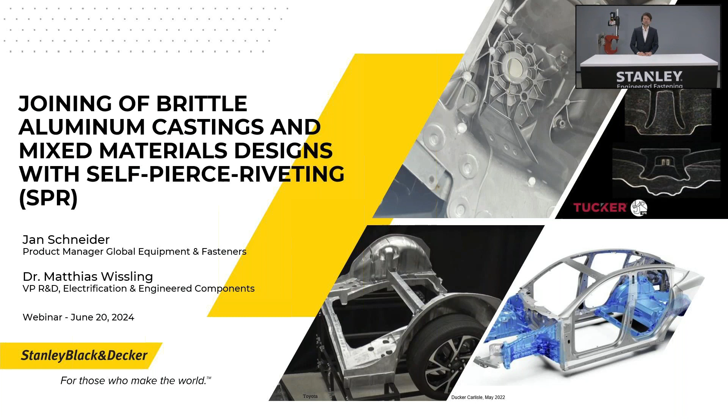It's a pleasure and honor for us today to give you an update on our latest innovations in self-pierce riveting, particularly focusing on castings. I have the pleasure to do that today with my colleague Jan Schneider from Product Management. He will lead you through the vast majority of the slides later on, so I have an easy job this time as I just lead you through the introduction slides.

My name is Matthias Wissling. I made my PhD in 2007 on joining technologies. As Vice President for Research and Development, I do the utmost possible together with the team to make sure that we have technically outperforming solutions for your challenges.

So next slide, please. I think we can skip that slide and go to the Stanley Black & Decker slide. So we are from Stanley Black & Decker.

That is a huge global company with about 17 billion revenue per year and about 56,000 employees. Stanley Black & Decker is organized basically on two main pillars: one is the tool and outdoor business, and the other is the industrial business. Jan and myself, we are from the Stanley Black & Decker industrial business, which is mainly Stanley Engineered Fastening. We have about 80 production and distribution centers all over the globe, and you can find our products in over 90% of all automotive vehicles and lightweight trucks on the road today.

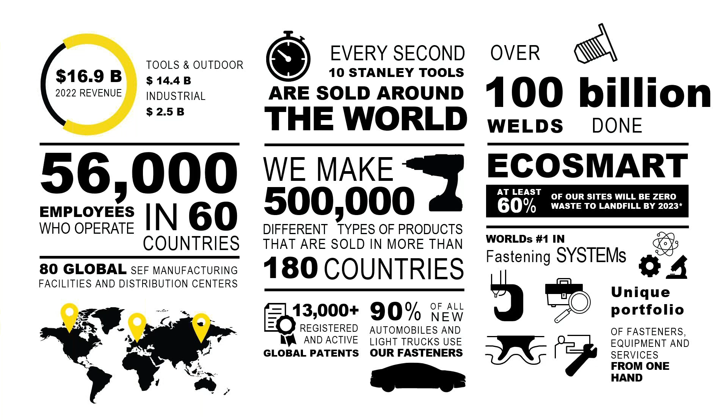Next slide, please. So at Stanley Engineered Fastening, we consider ourselves as a development partner for our customers. We have not one solution, but multiple solutions in order to make sure that we can always supply you with the best solution for your challenge. On this slide, you see a selection of some of the technologies we can offer you.

So we have stud welding, of course. Here, as with the other joining technologies, we have the equipment to automatically weld the studs in your production line, as well as the studs themselves. And we have here a no-hole solution, so this is 100% water and gas tight.

Then on top right, we have our self-pierce riveting technology. Also here we have the equipment as well as the rivets, the fasteners, and we also do the joint designs to support your body-in-white structures.

Number 3 is our blind fastening technology product line. Also here we have a great variety of different kinds of blind fasteners, including pop nuts, a great variety of different hand tools, as well as fully automated solutions, and a fully automated solution will come to the market this year.

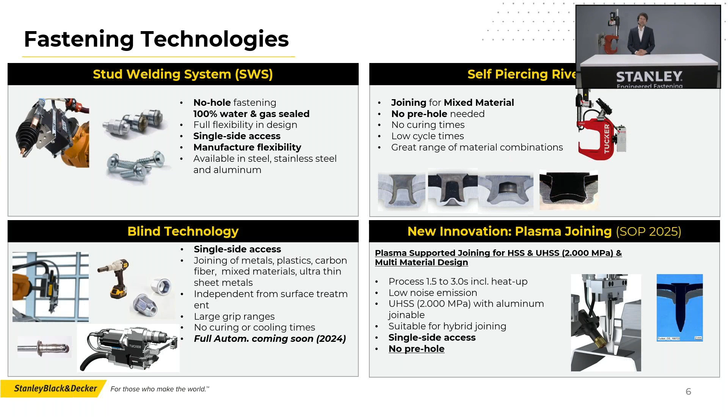A relatively new part is our plasma assisted joining technology. Here we are using plasma for the joining operations. Also here that is a one-side accessibility, and that could act, for instance, as an alternative to FDS.

Next slide, please. Of course, electrification is a main strategic pillar for us. We offer all the joint and fastening solutions for the battery, and on top of that, we are developing innovative solutions on the most challenging technical problems we see about the battery, like safety, fast charging, range, etc. Therefore, we develop solutions for thermal management as well as for pressure management, such as vent plugs.

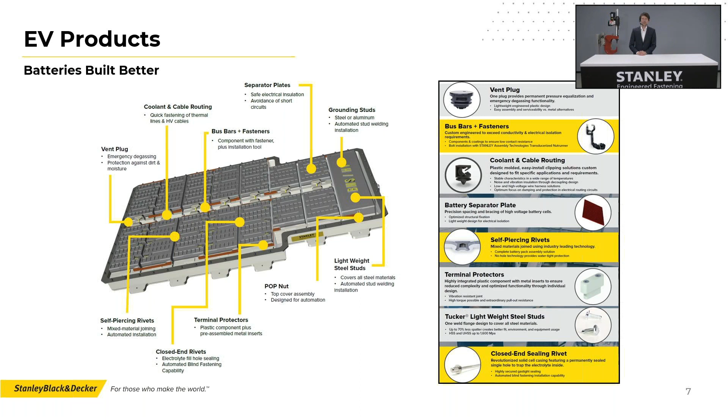Next slide, please. Sustainability in Stanley Black & Decker is a huge topic, of course. What does it mean for the different product lines? We would like to illustrate that here with self-pierce riveting. On the equipment side, we can offer you solutions with less power consumption and less air consumption, and we are working on an airless equipment solution which will come to the market soon.

On the equipment side I mentioned a few topics, but also on the rivet side we have a couple of interesting solutions for you. For instance, we developed new rivet generations which save about 64% of CO2 emissions for you. And it's not only a benefit in terms of sustainability, but since we developed a very lean solution here, we also have a very cost-effective solution, one that can compete successfully with spot welding on total cost of ownership.

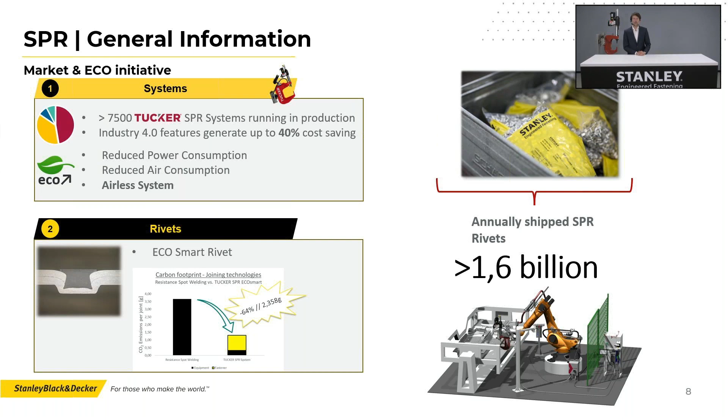Okay, next slide please. Here is already the time we have the pleasure to hand over to Jan, who will lead you through the casting related slides. Thank you.

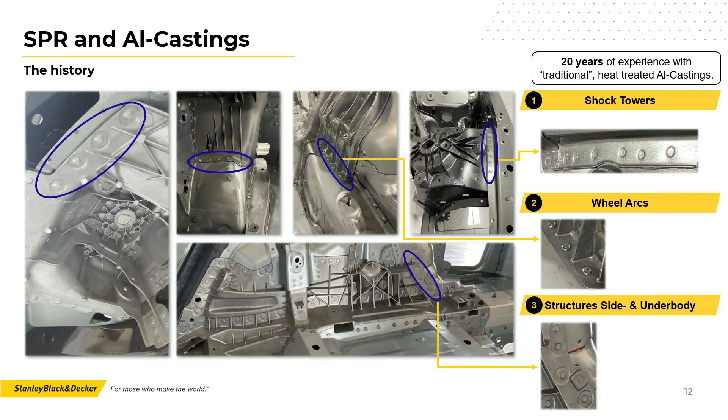So I want to start with the history of SPR and castings. Here you can already see a lot of pictures. On the left side, for example, that's a typical aluminum casted shock tower. These shock towers in different varieties from different manufacturers you can find since many, many years. Actually, the first one was close to the 2000s in an Audi car, and you can find them in many, many cars, like upper middle class, upper class, on the road right now.

You can also see a wheel arch or wheel arches and other structures on the side and under body that are done since a long time, actually, with aluminum castings. So these castings are middle small to middle size. Middle meaning — not when I talk about mega, I mean the really big ones that you're about to see. So when I talk about only these castings, I'd call it just the middle size casting.

And most of these castings are joined with SPR, especially because you connect them to other materials, like mixed materials. Then we have all the solutions to join these materials, but these materials are also heat treated. So why do we have to do a webinar if we are doing this for 20 years successfully and the cars are not breaking down on the road?

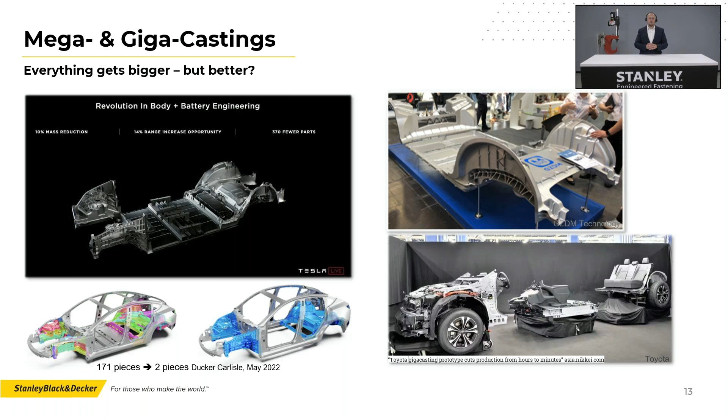But does it get better? First of all, I want to talk about why this trend even exists and what are the benefits for the OEMs to use this kind of big casting.

First of all, on the left side, you can see the trend that we are observing right now, meaning on the bottom side you have the conventional manufacturing, meaning a body in white consists of hundreds of parts. You have joining technologies, gluing, assembly technologies, welding — everything — and a lot of parts that are combined at the end into the body in white, the BIW.

But now the trend is more in the direction of making the casts bigger. First of all, what the first benefit is, you get a reduction of parts. Of course, if you can combine 100 parts into just one part and have the same functionality, the same complexity, whatever, why not? Second, you can save costs and CO2 because you will not heat treat these big castings. You need to figure out a way to use them without heat treatment, which means in F-temper state, so that you can really optimize the costs and CO2 savings as well.

And then, of course, you have the reduction of assembly processes, the reduction of joining processes, which is not really good for me as I'm doing joining equipment and fasteners, but this is the benefit for the OEM. And of course, you can have really good cycle times, really fast production cycle times, because a lot of processes are now sourced out to the manufacturer of the casting, and you don't need them anymore inside of your plant.

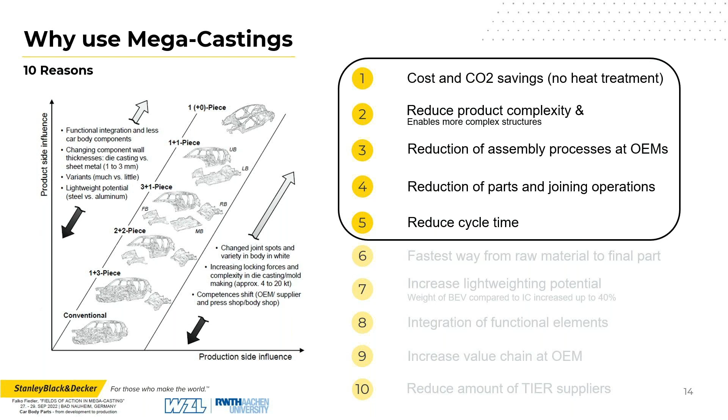There are more benefits to why you would use mega castings. For example, you can further increase the lightweighting potential, or make more complex structures, or integrate functional elements directly into the cast. So it should be clear why the market wants to use mega castings for body in white production.

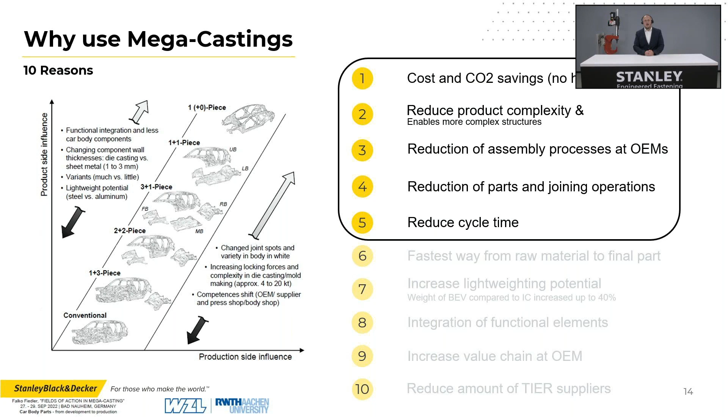But are there any challenges with that? Now I want to talk about the challenges first, then step to the solutions. Casting is for sure the fastest way from raw material to the final functional part. But is it the best way? What is the challenge of that?

So we have to admit there is no perfect mega casting, and maybe never will be. It's more about when the manufacturer and the user connect and define how many imperfections are still okay, how big they are, where they can be, just to define rules to make sure the part is still functional and can still be used. But you will never get a perfect one. So we have to deal with these imperfections.

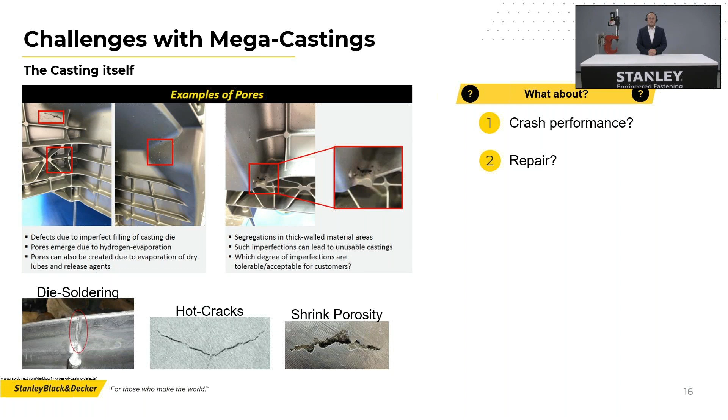Other questions the OEMs are asking is what about the crash performance of castings, and what about repair if something breaks? It gets really difficult to repair something if a car, at the peak of the trend, consists of just one big mega cast. Then it might be hard to do something on the repair side. But are there more challenges? Yes, there are.

But what they all have in common, especially when not heat treated, is that they are brittle. They have reduced ductility based on elongation at break. I use elongation at break as an indicator to say something about the ductility of the part or material. There are more indicators for ductility, but I'll use elongation at break, and going forward we'll keep using elongation at break as that defining ductility value.

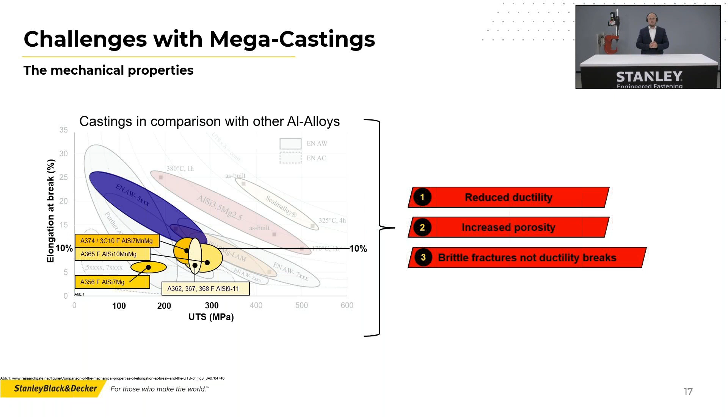But there are even more challenges, and this is why we have to have this webinar. So at the end, there are also challenges in the part design, because the material itself, the cast itself, is inhomogeneous. Even if you have one part with the same alloy, it depends on where you do the joint or the material testing: is it close to the entry or the end of the aluminum flow? What is the flow direction? Do you test vertical to the flow direction, or in the same direction when you do tensile tests? So we see different features and different mechanical properties on the same part.

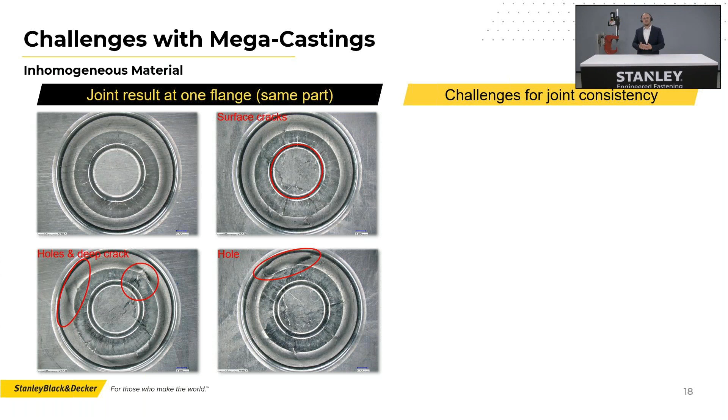So you do another one close to the second, 2 centimeters to the side, and you see something else: there's a hole now, and there's a deep crack. When I say deep crack, I mean cracks that go really deep — if you do the cross section, they go really deep, up to the rivet itself, so the material is completely broken on one side. Then you do a fourth one, and you see the hole again, which wasn't there in the first and second, but was on the third. So you have many different outcomes on the same part, because this material is inhomogeneous.

One addition you can also find is that the closer you get to the flange edges, the higher the risk of getting a flange crack — though this isn't always the case. When you aim for a perfect button without cracks, it seems there's more stress into the surroundings of the material, so the chance is higher to get a flange crack. With these results, you might need to think about redesigning the flange size, and some OEMs are already doing that because they're aware of this issue.

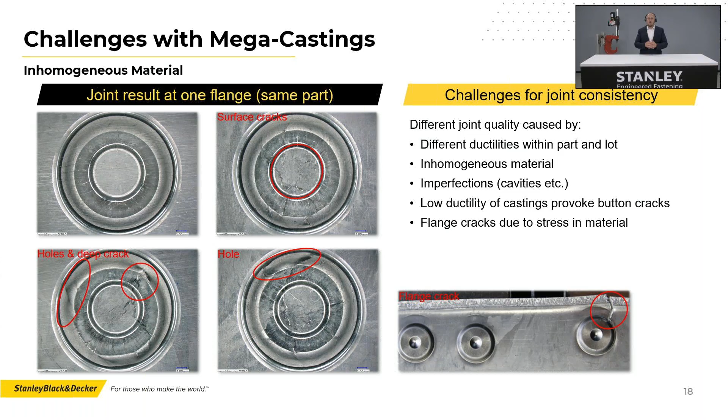So this is the last issue I can show you here on inhomogeneous material. How do you work with and deal with these imperfections and challenges when you want to join them at a consistent rate, to reach the right CPK values and not have high PPMs? The first thing you need to do is a lot of testing and a lot of failing — we've done over 1,000 tests on these materials, different ones, and we saw many different failure modes.

You can have flange cracks, all the problems shown in the slide before. You can have holes, surface cracks, a complete crack where the button falls off the sheet, or insufficient interlock — all of these issues. First, you spend time in the lab; you get the material, which isn't always easy if you're not a manufacturer of these materials. You get the material, get your specimen, do the tests, and fail. Then you work through these failures, try to understand what's happening, and figure out how to improve our rivet and die designs to support these materials. But testing takes a lot of time and a lot of work.

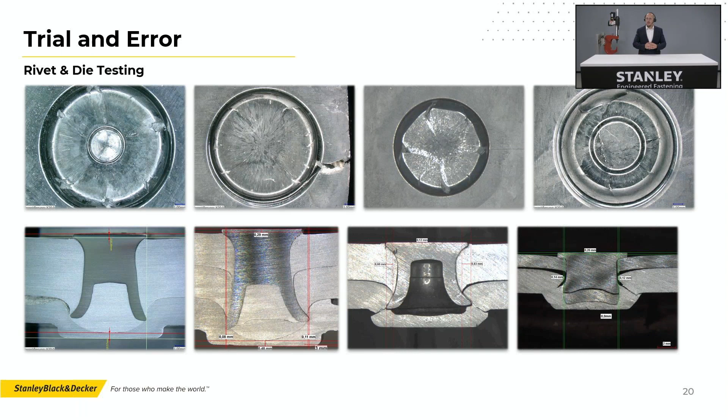So in addition, we need to do something else, which is simulation. On top of all the testing, we use simulations to model the material flow inside the die, so we can see how the material behaves, how the rivet and die behave, how the material flows, and where the highest pressures and highest stress are on the material. This helps us determine new geometries for the rivet and die for these castings.

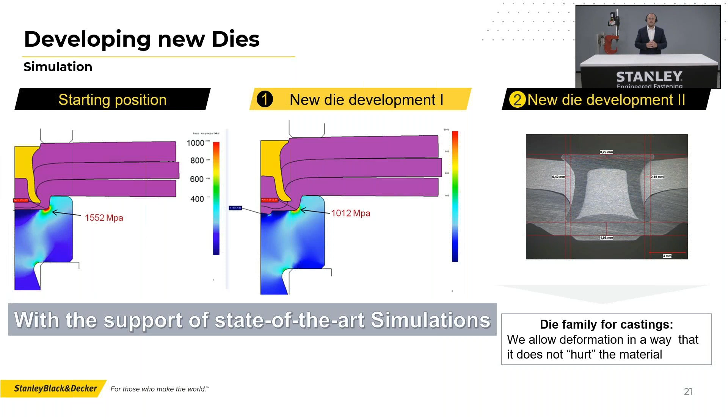On the next slide, you can see what came out of this testing. These rivet and die solutions, and I will go through each one of them, are our solutions for castings. On the top, there are three pictures, these are the dies. On the bottom, you can see five pictures, these are rivets. Some of the rivets are completely new, came out this year or still coming out. Same as one die in the top row. Other rivets and dies were already existing.

So let's start with the first one. First one is just the flat die, I'm talking about the die, not the rivet, in the first picture on the top left. It's a flat die that you can use for more ductile castings, meaning if they have a T7 or T6 heat treatment. These flat dies are perfectly working.

Then the second picture, it's a casting die that we developed, and you can get it with flow barrier feature or without. In this picture, the flow barrier feature exists, and you can use this die for lesser ductile castings. Then the newest development, the fancy geometry on the top right, that's the special casting die, which is a mixture of the casting die and some improvements to really support the material flow and to ensure a really low risk or no risk of cracks with F-temper. That's what I talk about the most when I discuss these F-temper castings, mega castings.

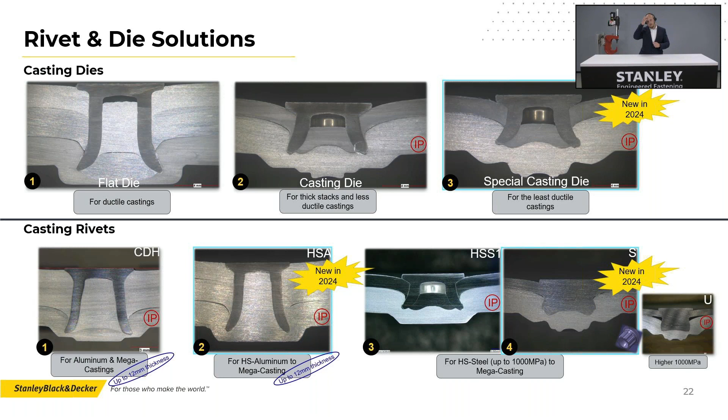On the next slide, you can see some examples. In these examples, we used a DP600 to a 3 millimeter aluminum casting, and we used different castings. You can see the alloy information, AlSi7, AlSi10, and the first picture is F-temper, meaning no heat treatment, with elongation between 5 and 11%. The next one is T5 temper, and interestingly, T5 is worse than F because the elongation is even lower.

So for those low ductile, brittle castings, we use the special casting die. And for the more ductile castings like T6 and T7, we can use the flat dies. All of these results that we show are without cracks, so these are all okay joints that can be used, that can run in the car, on the road, in your production. Nothing will fail.

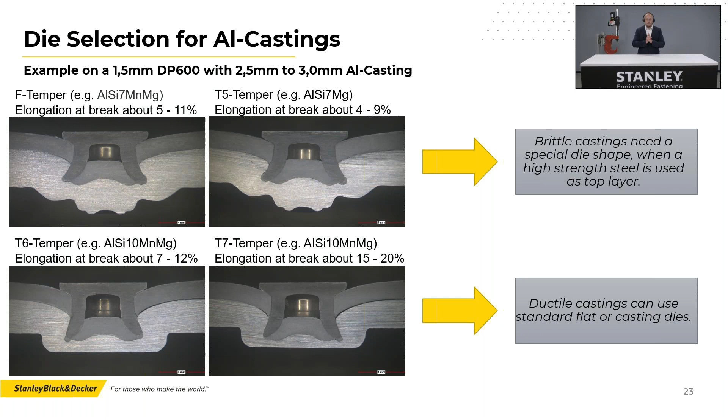But now I have shown you rivet and die solutions. We are a system supplier, and we also supply the process, meaning you can only withstand and overcome these challenges when you look at everything around SPR, the process, the rivets, everything. So in recent years, we have followed a rule that our process is a distance-driven, travel-driven process, travel control, I call it. So we drive to a position, it's a position control, rivet head height.

We drive to that position and we monitor the force for sure, but it's not a force-driven process. We still have the rivet length measurement, the sheet thickness measurement, and all of that. But what we did in the last years was we compared different setting speeds with our system, running at 300 millimeters per second, 200, or 100 millimeters per second. We compared the results, and there was no noticeable difference for 99.99% of the cases. So we always said our speed is not adjustable. You go with full speed, best cycle time, and that's how you set the joint.

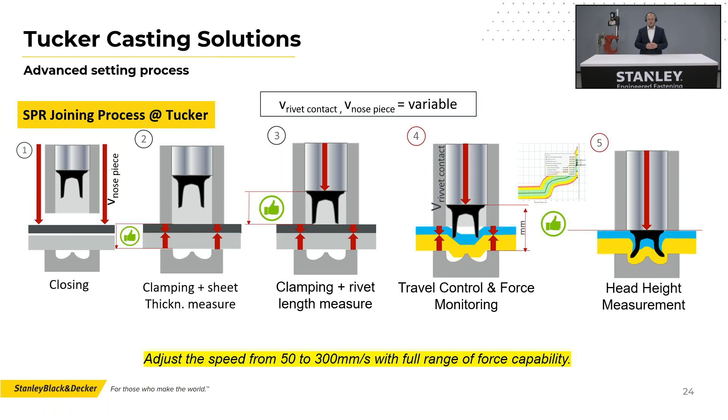After all, when we talk about these solutions, new rivets, new dies, and a more adjustable process for setting speed, we can say that we were able to join all of these alloys for the brittle mega castings we have seen so far in the market. So for us, the 10% elongation rumor, or rule, or whatever you want to call it, because it's not written anywhere, like it's not in a physics textbook, that this is the number, but maybe you encounter this. It's not applicable for us because we have also joined 5% elongation brittle castings. So far, we can say that yes, SPR is still the best solution for your cast.

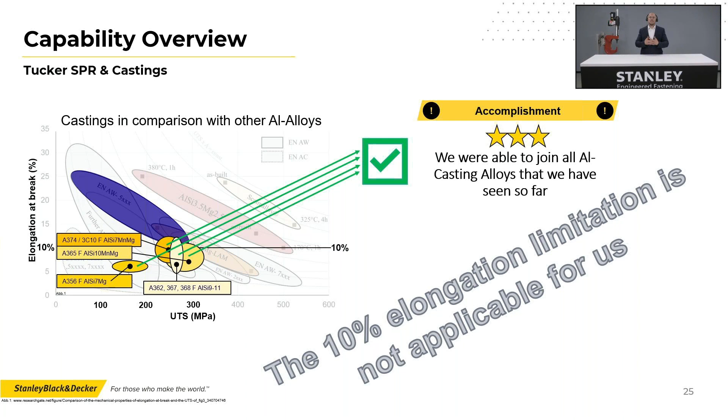But what happens when it gets even more challenging? We've talked about the casting, the bottom material, its deformation, the cracks, and all the challenges that come with it. Now let's talk about the joining partner. What happens if the joining partner is an ultra high strength steel, 1500 megapascal, 2 millimeters, or 1800, or 2000 megapascal? We see this trend going up, the use of these steels increasing, but of course you need a solution to join them, because a 2000 megapascal with mechanical joining is quite difficult. Why use them? Maybe to increase lightweighting potential, and maybe better crash performance, because in combination with castings that are weaker on crash performance, that's a perfect solution. So what happens when you do the brittle casting together with the ultra high strength steel?

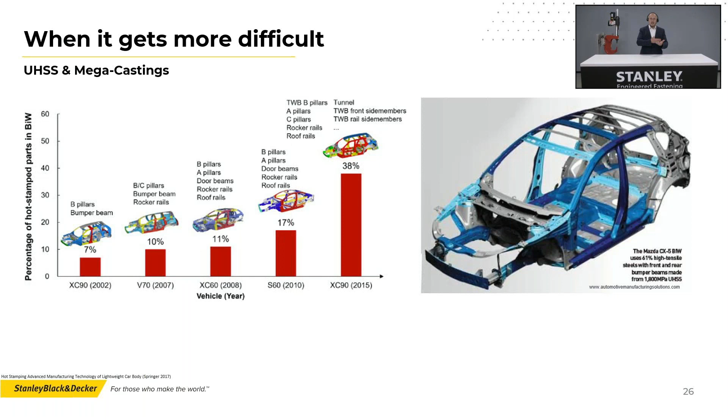Here you can see what I'm talking about. On the right side, again, it's the elongation at break to ultimate tensile strength graph. The yellow circle represents the F-temper castings, they are around there. The blue one on the right side is the ultra high strength steel, up to 2000 megapascal. So in this case, you need to think about joining these most critical components together, one on the left side and one on the right side. It doesn't get any more challenging than that.

So what you would do is check: I need a rivet that can pierce through the ultra high strength steel, so I choose a rivet. But I also need a rivet that supports the deformation of the brittle aluminum cast, and the correct die for it. The same rivet will not work for both. So what can we do about that?

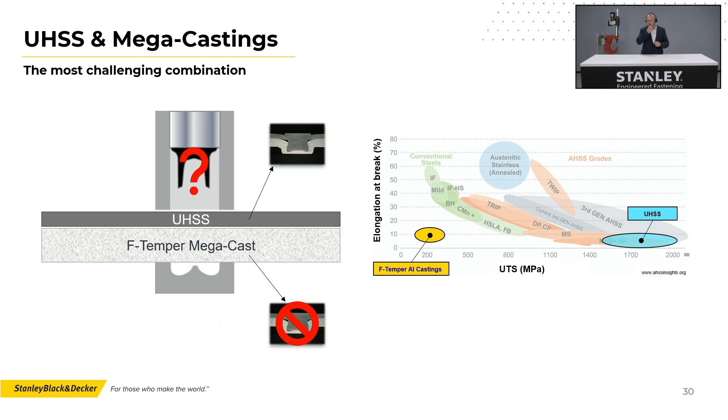Let's go on and talk about SPR innovations. The question was, what do you do in this situation where you want to join the 2000 megapascal to the brittle F-temper mega casting? We thought about many different ways, but we came up with one really nice solution.

This is our plasma joining, a single-sided joining technology. We showed this at the Automotive Circle joining event in Bad Nauheim this year and last year. Most of you are maybe aware of this. If not, we use a plasma with argon gas to heat up the top layer.

We used this plasma. It's a non-transferred arc, so we are just shooting a flame on top of the material. We first used that in our stud welding systems to clean aluminum sheets because they have dry lubricant and all of this. We clean that to have better aluminum welding results on the stud welding side. There we don't make anything soft, we just clean the surface.

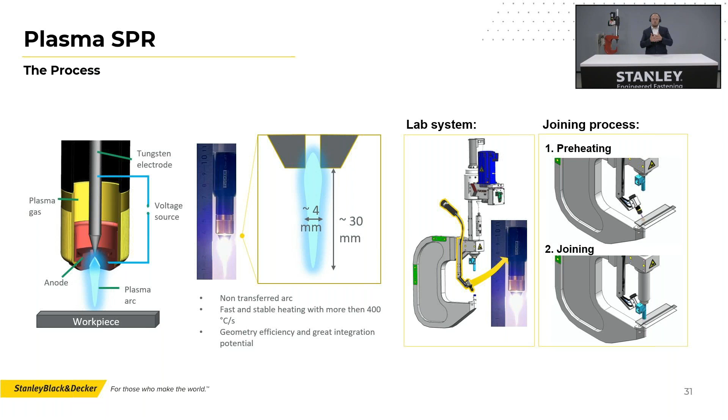Then we thought, okay, now we use that for plasma joining to pierce through 2000 megapascal with our plasma pin. Why not connect this to an SPR system as well? Because standard, traditional SPR, also has its limitations. How that works is pretty simple, you will see that on the next video.

This is a slow motion video, and you can see that we are shooting the plasma on top of the, in this case, Usibor with 1500 megapascal. And then we just directly after that set the rivet, joining these two combinations. So it's Usibor 1500 megapascal into an aluminum. You can see that the process overlaps a little bit, and it's quite fast. This is slow motion, but it's really quite fast.

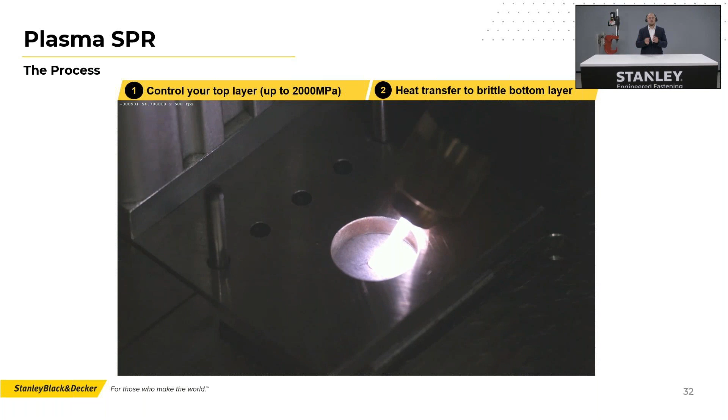We use the plasma, which is, by the way, around 2 centimeters away from the top metal sheet. We use the plasma to make the Usibor soft. We don't want it liquid, we just want it like orange glowing to make it soft. Then we pierce through the Usibor with a rivet. And of course, why I want to talk about this in our castings webinar is we also supply some heat to the bottom layer because the heat is traveling through the stack.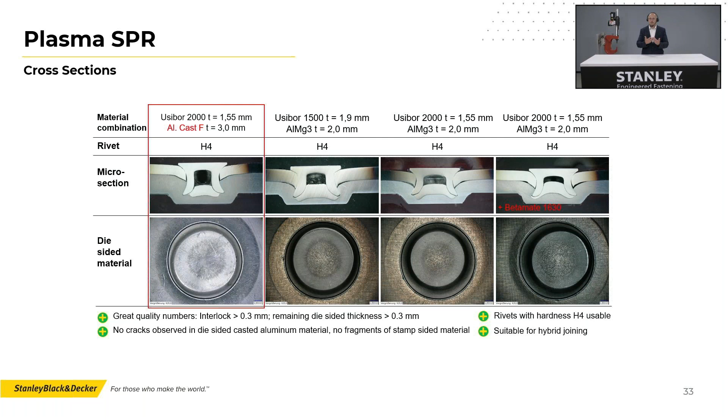And in addition to that, lower forces, end forces, you also have a much lower punch stroke, meaning usually with traditional SPR you need to punch through the ultra high strength steel, and whenever you have the chance, maybe you've already seen or heard how that works, you can hear it in the whole line. It can sometimes be really loud if you punch through these materials with an SPR, so if you have multiple machines, it can be quite noisy in your manufacturing area.

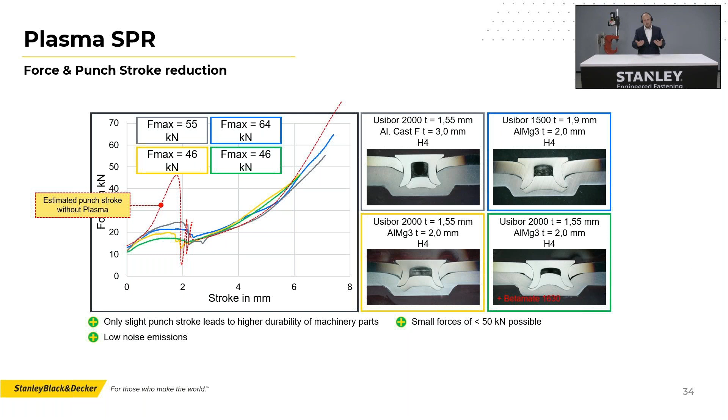So that's another benefit. Now we talked about the top layer, how to get through the top layer, but I already said we are talking about mega castings here, so now let's switch back to the mega castings part. We are joining these combinations easily with a flat die, because we transport heat from the top to the bottom.

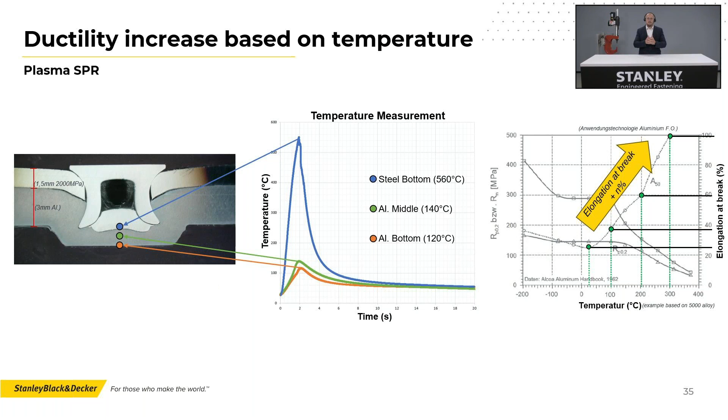Okay, but again, we are shooting from the top, and heat is traveling through the bottom. At this point, I would normally end the webinar, but I have one or two more things that I want to show you.

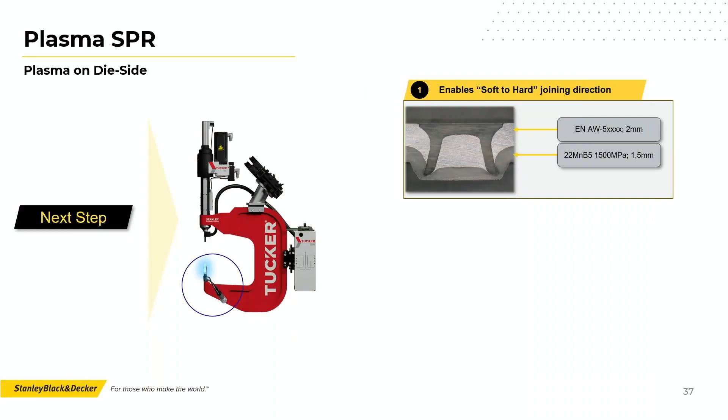The first thing is really a world premiere, because I saw the results just a few days ago, and this is the next thing that we want to do on the SPR side. Who would have thought, maybe all of you had the idea already, we are doing SPR from the bottom now. So all the slides you've seen before were SPR from the top, but the good thing about SPR is we have two-side access, which means we can also use the plasma from the bottom.

Using the plasma from the bottom enables two things. First, it makes SPR a solution for a new, more extreme joining direction - soft into hard. You can see a cross section on the right, where we joined aluminum into Usibor 1500 megapascal, and it worked fine.

The second benefit is that when you have the plasma on the die side, you can even more control your bottom layer. So we can use it on the top side or the bottom side, depending on where the more critical material is. Use it from the top and have heat transferred to the bottom, or if your top is not a problem but you have a really low ductile, maybe recycled casting that looks like a puzzle and you can break it with your hands, then maybe you try plasma from the bottom, and you get really nice results.

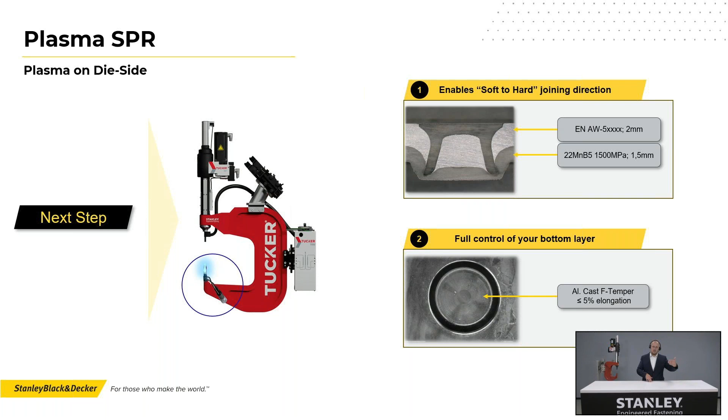And of course, the plasma is freely programmable in time, energy, and power, meaning you need more power for the Usibor to pierce through it, but if you only need a few hundred degrees in the aluminum, you don't need that much power. So you can freely program it depending on the material combination that you have, and you're good to go. So this is the next step.

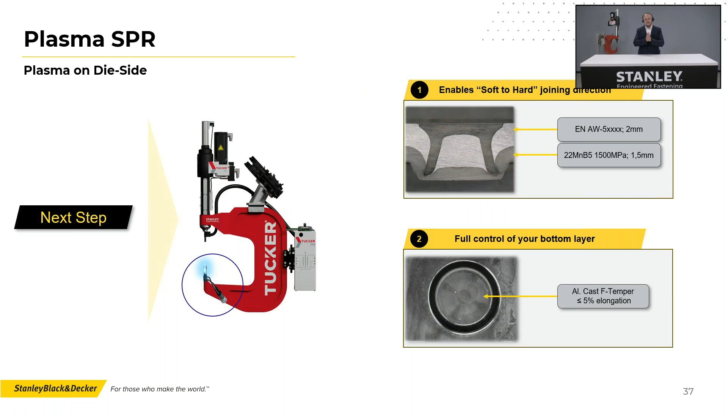So if you're interested in testing this, or have the need to test or use it, just contact us and we will arrange something with you to get a system and do tests together, so you can see for yourself how great this technology is.

So it takes a little bit longer to get a system that we could ship somewhere. We are still learning and testing it, so this will take a little bit longer, but it will exist at some point.

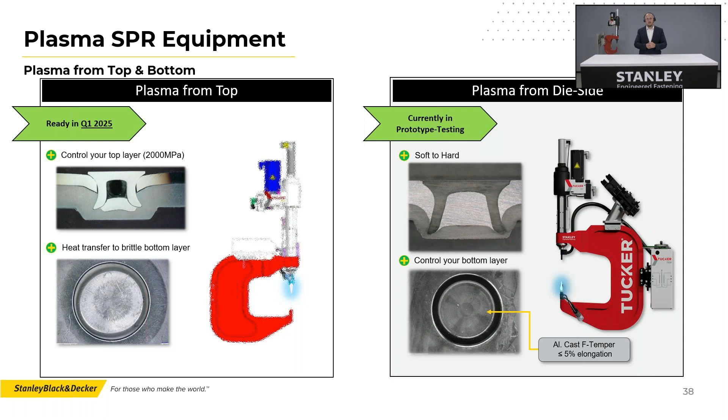Now, the cherry on the cake before we end the webinar and go to the Q&A session: upgrade your existing TRC, meaning this plasma process is a complete optional process that you can add to upgrade your current existing TRC equipment.

100% flexible means you only need to upgrade the guns, the tools that might have these kinds of critical joints, like Usibor on top, Usibor on the bottom, or brittle materials that you want to join with plasma.

And 100% optional means even when you've upgraded one tool with the plasma function, you can still use it without the plasma, and the plasma will not come in your way.

It will just stay at the rest position. You can do your normal aluminum to aluminum joining with your rivets. And once there is an ultra high strength steel that you could not join with that rivet, you just add the plasma feature.

You turn on the plasma and do the setting with the same rivet, if the length and everything matches. So that's the best benefit from our side on the equipment side as well for plasma.